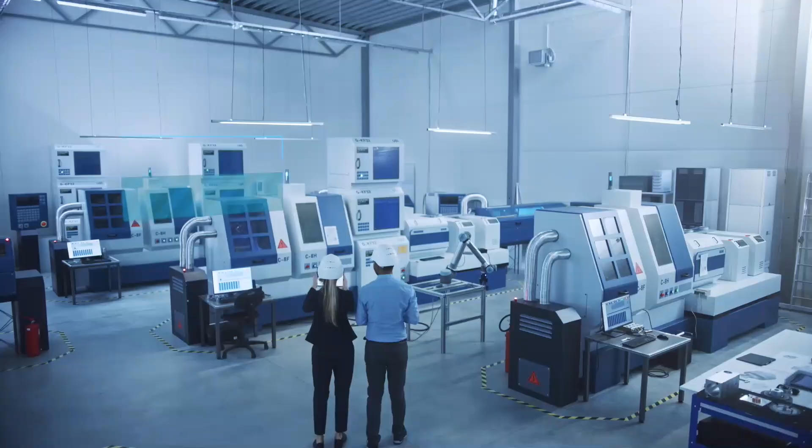Welcome to OPC UA for flat glass industries. It's the OPC 40301. And like already mentioned, I'm very happy that we have these three speakers. So we have Gerald Fehringer, Markus Schoisswohl, and Gesine Bergmann. And I would be very pleased if everybody of you could introduce yourself to our listeners.

All right. Thank you, Heiko. My name is Gerald Fehringer. Welcome to this presentation. I'm working for the company Lisec, situated in Austria, for more than 25 years now. And there I have a position as a system architect for our software landscape. And we at Lisec, we are providing machines as well as software components to our customers.

And we are in need of interacting with the machines with a lot of different software vendors. On the other hand, with our software with a different number of machinery vendors, and as such we are very interested in the interoperability, and this is why you see me sitting here basically in the first place. And secondly, I'm very pleased to be the chairman of this joint working group, and I have taken over this position recently from Markus, and I would like to hand over to Markus to introduce himself.

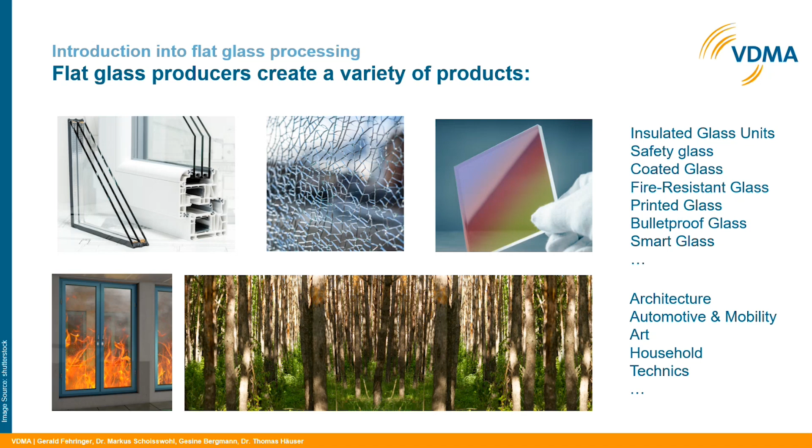These were only some examples, but I think these examples already show that flat glass and also the derivatives of flat glass really play a fundamental role in modern living. For creating these products, of course, various processes are necessary, and we can only point to some of them.

First of all, the cutting table, because cutting is the initial step in glass processing, where stock plates with a size of 6 by 3 meters are cut into pieces. This involves scoring the surface with a diamond or a carbide wheel at first, and then snapping it along the scored line. Or you can also use a laser and a thermal shock for cracking, or even water jet cutting is used. Important is the precision here, because this is crucial to minimize waste on the one hand and also to ensure that the pieces of glass are cut into the right required dimensions.

Following the cutting process is the edge processing to make the edges smooth. This can involve several steps like grinding, polishing, or beveling. What kind and quality of edge is made really depends on the application of the glass and the final product. And you should also keep in mind that this edge processing also increases the level of safety for handling throughout the lifetime of the glass.

Another example is drilling. This is also necessary in glass processing if you want to produce glass railings, for example, or facade installations. And this can be done mechanically, as shown here on the picture, or also by laser. Now the machinery starts to become a little bit more complicated.

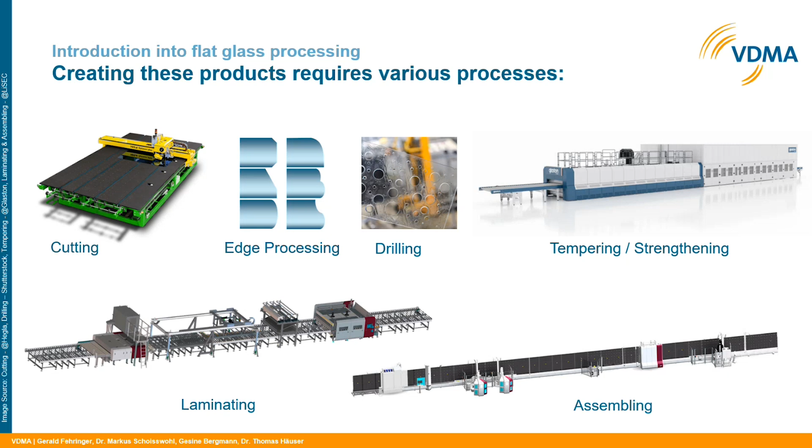Last but not least, the lines are becoming even longer, as in an assembling unit for the production of insulated glass that you have seen on the very first slide. So assembling really means a combination of at least 2 or more glass panes with spacer and sealing, to finally create a unit. This is filled with an insulating gas or air gas mixture in the space between the panes.

There are some more processing steps available. So each step is really necessary and really has to be taken into account quality-wise for the production of high-level quality products of flat glass. So why is it now necessary to introduce OPC UA into flat glass processing?

Flat glass processing companies are grappling with numerous challenges. First of all, very often we have the challenge that we have an order size of 1, that complicates the production process. That also means that the machines have to handle a variety of glass types and also glass thicknesses, but every time with the same high precision.

So automation and efficiency in the production process is really critical to meet the tight deadlines. A second challenge is that today customers have really high quality demands and they can easily detect defects in the glass product. So we also need an advanced quality control feature to ensure that we deliver defect-free glass products.

Then we have the challenge that very often the companies are small or medium-sized companies, and they are very often also serving local customers, and this is intensifying the competition. The energy-intensive nature of glass production already poses challenges on the whole industry with the rising energy cost. And the energy efficiency of the machines is also becoming increasingly important to control the production cost.

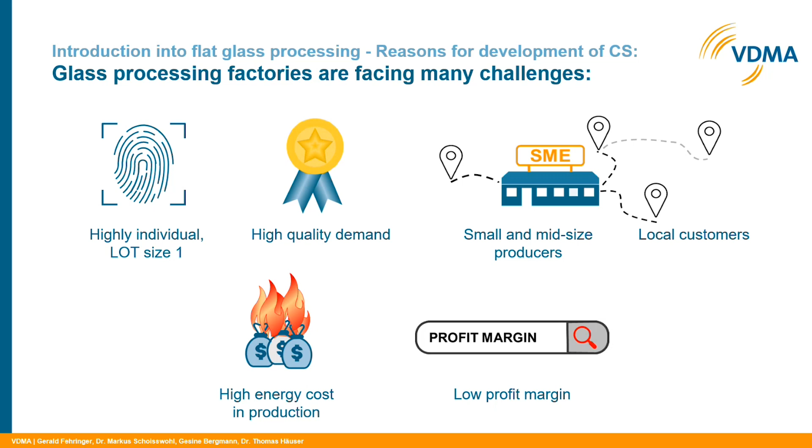Altogether this leads to still slim, low profit margins due to the high level of competition and due to the production cost. If you have a look at this production site overview, you might now get an idea of the possible complexity of a glass processing company. And with this, you can maybe understand why implementing OPC UA interfaces is really essential. I will only mention 2 or 3 key reasons.

First of all is interoperability. OPC UA is an open standard enabling seamless communication between diverse devices, regardless of the manufacturer. In flat glass processing, you can see we have various machines for cutting, processing, tempering from different vendors. So by standardizing communication protocols, OPC UA really allows the integration of equipment from different manufacturers to facilitate a cohesive and efficient production line.

Second point is data acquisition and monitoring. One of the advantages is the ability of OPC UA to facilitate real-time data. In flat glass processing, we need lots of different data from numerous parameters such as temperatures, processing times, pressures, and OPC UA enables the collection of the data from various sensors and machines, providing a comprehensive visibility into the process. This all leads to enhanced automation and control.

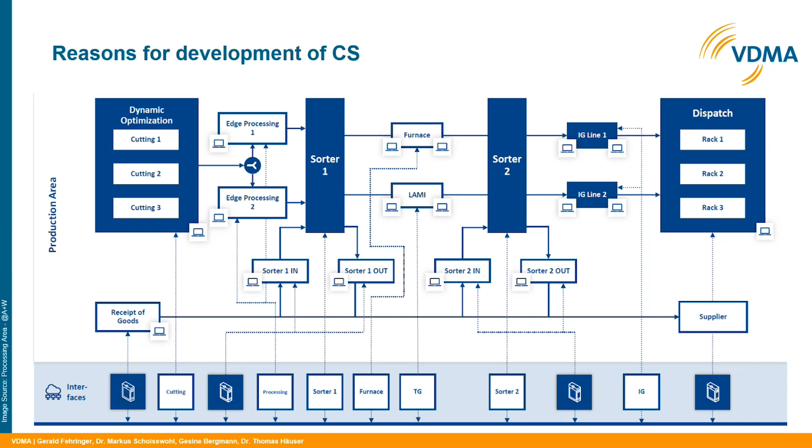OPC UA supports automation by allowing different systems to communicate and to coordinate their actions. In flat glass processing, automation is really crucial to maintain a high throughput and precision. I think there's no need to talk about scalability, flexibility, security here, because these aspects were already covered in the talks given before. With this, I start to hand over to the next speaker, allowing you to have a brief look at the members of our group.

I'd like to start, as one of the founding members of the OPC UA for flat glass specification, with a history. It all started in 2019 when about 10 specialists of machine builders and software vendors in the flat glass industry sat together and thought about how we can improve our performance with respect to our customers. It was rapidly clear that we can gain the most if we have a perfect performance while commissioning our machines and software.

That means this shall be smooth and as efficient as possible, meaning that we have to have interfaces that are not proprietary, creating risk and downtimes, but something that is standardized. Thinking of the topics that have to be communicated, we thought that there are three needs a machine requires in order to communicate. On the one hand, who am I? That means a machine can identify itself. The second is, what do I have to do? And the third is, how did I perform?

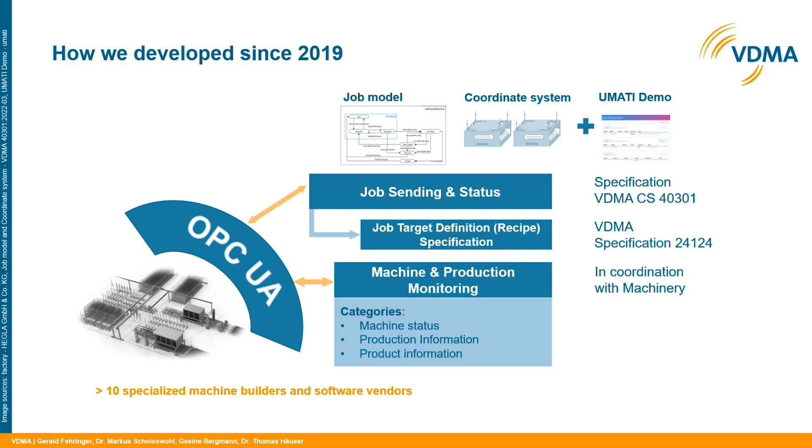So coming back, how it all developed. So first we had our specification for job sending and status, and we thought, you know, the world of flat glass is so complex. Let's be happy if we can have a solution that fits already for us. And this is exactly the context, and that was the mindset, how we developed our first specification. Also creating a job model, a state machine model that was particular for the glass industry, certainly derived from other job specifications, together with Sebastian Friedl, who did an excellent job. And we thought, hang on, this is great. This is already working. But we were in the bubble of the flat glass.

However, our job specification was such a success with us that Heiko came across, and he thought, hey, I need some new ways of working, or I need some new specifications to work on. And this is how we decided that the job specification of the glass can be one of the major starting points to create the job specification for machinery. But certainly, that is not something that the flat glass industry on its own can define, but we need the impact of other industries, the plastic and rubber, the woodworking, and all others that were involved and did an excellent job. Together with Wolfgang, we learned how important the ISA 95 is. Honestly speaking, for me, it was not known to that detail.

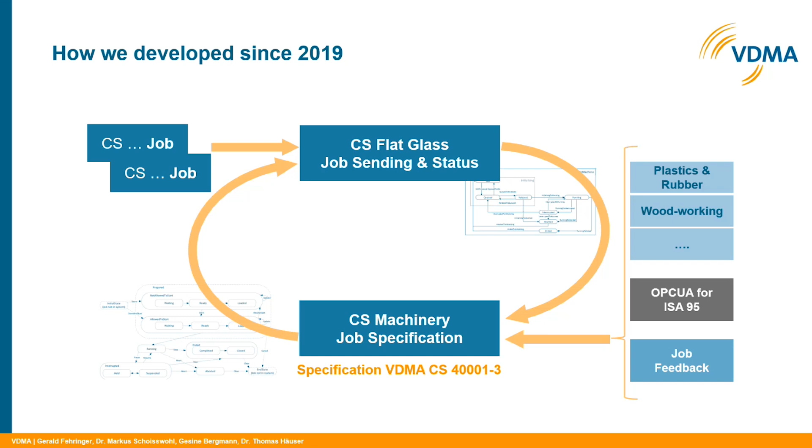But the important learning for us was that now we can use this as a basis, which is a very global basis, and where we can be sure that this will stay for a long time, as a lot of companies, not only in the flat glass industry, will apply this standard. And we just have to put our add-ons into the flat glass specification. And that means that we really have a strong reduction in the volume of our own specification. So it means coming out of a situation where we said, let's find something to unify the flat glass industry and create a standard.

And yes, we are so particular, we cannot be compared to anyone else. We have changed into an organization which says, hey, look what's already there on the machinery. For instance, for the file transfer, for the feedback, etc.

And only particular things like the job target definition and some particular specifications and conventions that had to be applied, had to be agreed, they shall be then in the specification, meaning that the new specification that is going to be released is of scope, of intellectual scope that is required to be recognized, less than 1/3 of what we had before.

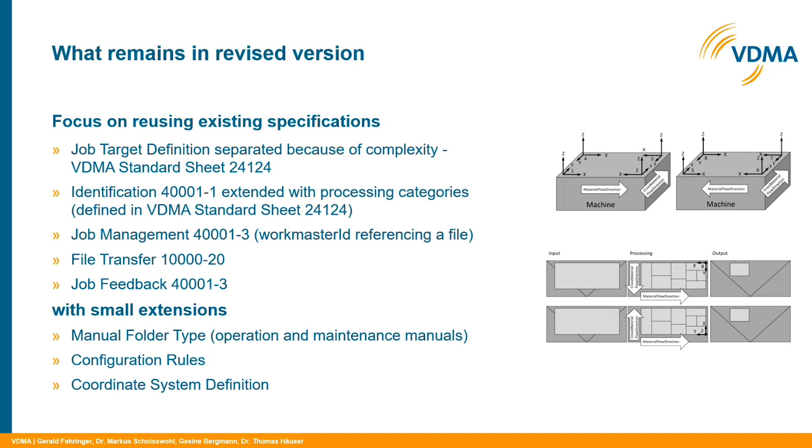And I think that's very important, because nobody's very interested in reading a lot of pages and saying, hey, I think I have this already somewhere else, and why do they make it in this particular way? But having said that, I don't want to focus alone on saying, okay, look, we reduced the volume and scope of our own specification, and therefore maybe it's not worth that the flat glass group may sustain in the future.

On the contrary, I think what we managed to do is to change our way of thinking, of saying we go beyond being self-sufficient. And what I mean with going beyond being self-sufficient is simply by asking questions within the group that we relied on later on into the machinery. And I'd like to show this on 2 examples.

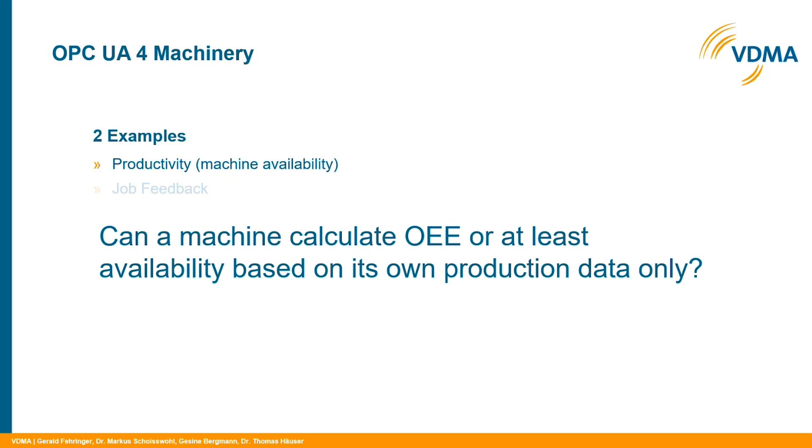The first one that we had when we were talking about machine feedback was, can we calculate OEE or availability as a base for the OEE only on machine information? And if you talk to machinery builders, especially if they do Industry 4.0 machines, they say, yes, for sure we can do. And I agree, they can do it. But is it the proper way to do it? And how can we do it together with OPC UA? And those were the questions that we were asking ourselves.

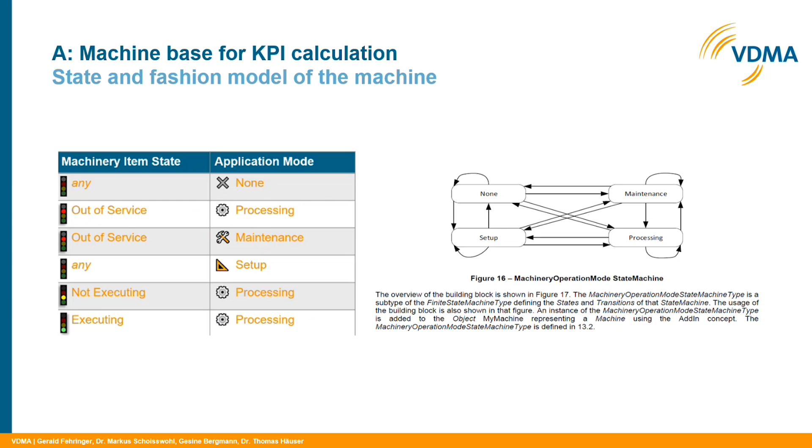But the question is, is this true? Yes, if you calculate it like that, and if you say that is the standard how it's calculated, then it's fine. But is it agreed, and is it an international standard? And I'd like to show you why you should put such simple answers into question by a very simple approach. Let's suppose you have an MES system, and in this MES system, you have planned already 1 hour of planned downtime for maintenance on your machine.

So that changes completely, because in that case, you're not counting on 8 hours, you're counting on 7 hours, and suddenly your availability increases from 62 to 71%. And the beauty of that is that suddenly you are compliant with international standards.

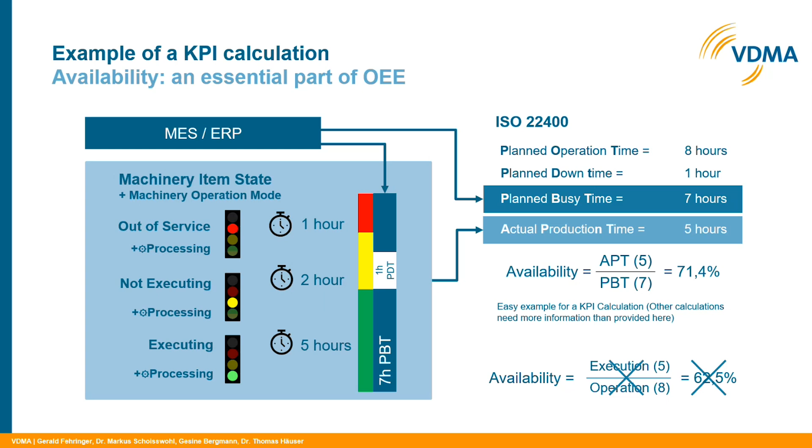So that means, and I hope this is very clear, that the machine on its own can be a source of information, but can never be self-sufficient without getting information from an MES system in order to calculate the proper values. Now, having said that, it's not a piece of cake to calculate the right values. And this is why I'd like to show you a little bit what is behind the ISO 22400.

The ISO 22400 example given for the times has a defined model. And honestly speaking, I find it very beautiful because it's simple. It talks first about planning. So you have a reference time that can be your 8 hours of production or whatever you have, or a day shift of 24, right? Then you have the possibility to say, look, from this time I take only operation time, and if there is a planned downtime, then I have a planned busy time of only about 6 hours, whatever it is.

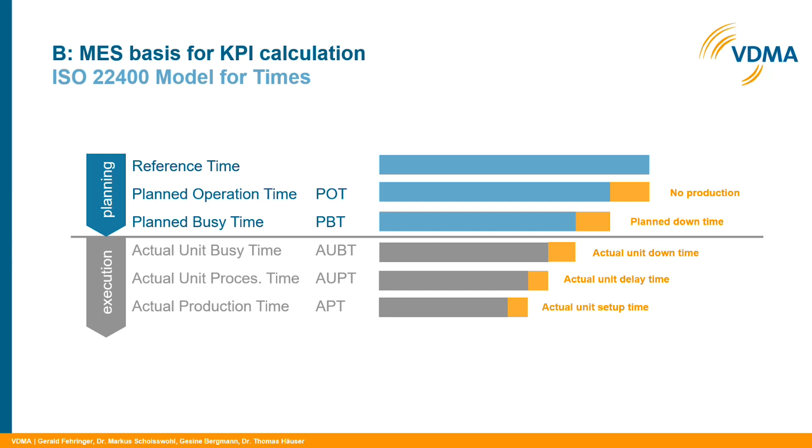But the point is that as a second source of information, it takes already the machine also with the times of actual unit busy time, processing time, and actual production time. And if you use this nomenclature in order to calculate, then you are on the right track. But the point is, how can we bring them all together?

And this is where we did a great job providing information from our OPC UA model and combining it together with information from MES. And here we had the great help of one of the experts developing the ISO 22400, where we made a reference table how we could incorporate the states of the machine itself into this model in order to calculate the proper KPI factors for the OEE. And the beauty of it is that this is now part of the standard of the 40001. I think it's the 1 or the 2, whatever, one of these specifications.

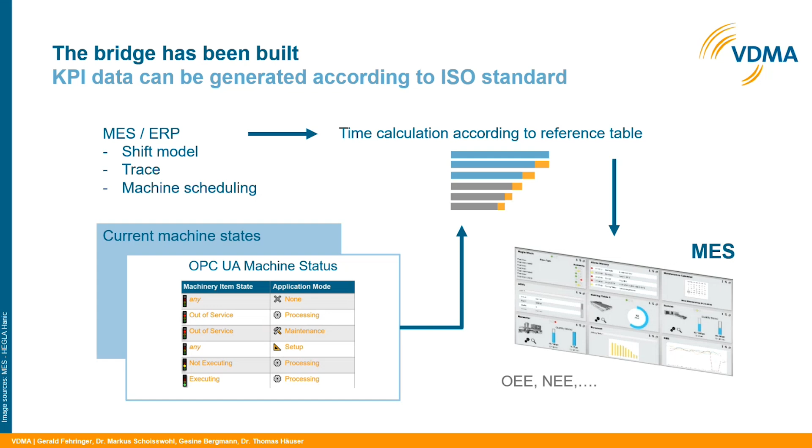Important is here we could show that the glass industry itself was no longer thinking only on its own. It started an idea, and it brought it to the attention of the machinery. And even further, we thought of what can be a reasonable business case that can be achieved by integrating other standards. And in the same way, we were thinking about job feedback. Now, what does job feedback mean?

A regular flow of job is exactly presented in the graph as you can see it here. You have the job definition, you prepare it, you run it, and you end it. It can be interrupted, aborted, whatever. However, whatever the job is, may it be a milling and drilling, may it be a grinding of the surface, may it be a drilling of a hole, may it be a painting, may it be an assembly of an IG line. Honestly speaking, it doesn't matter.

In the end, what you have is general information, which means when was the job done. Product information, that means which forces, which positions, which tools were used in order to produce the material. And the third is the bill of material, becoming more and more of importance as we have now to track supply chains, let's say, in line with upcoming regulations about supply chain management and supply chain follow-up.

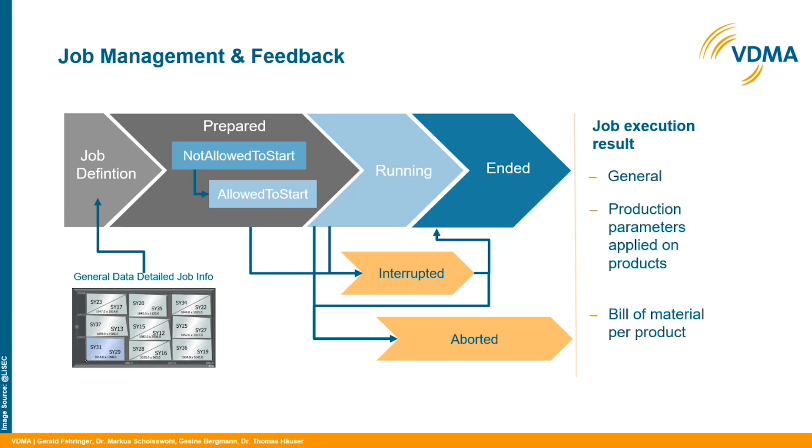So we have created also our own model for glass and even for another industry in order to show how such a standard of communication can look like. And the beauty was that Mr. Manke, Wolfgang, he came across the ISA, and he saw, without knowing from our side, that basically the standard of ISA-95 is not so far. So we could basically compile both informations and we could create a model for job feedback with this universal. And I show it just for you on two examples here.

One is a cutting of a glass where out of one product, that means one big glass sheet, as mentioned by Gesine, 6 meters by 3.21 meters, a few sheets, like 5 of the A1 and about 6 of B12 and a little bit of waste, are created out of it by cutting, scoring and breaking, basically. So it allows to do this kind of operation, as well as exactly the opposite, that you assemble something.

You have sources of raw material that can be paints or that can be spacer, desiccant, and gas, and you compile it to a product, including also general information and process parameters through the way. And the beauty of that was, once again, we started in our group, we brought it to the attention, and we could create a standard that is broader than what we will ever have in the flat glass industry. And the broader a standard is, the more people are potentially applying it, the more it has the chance to survive for the future. And that was the interest that we had.

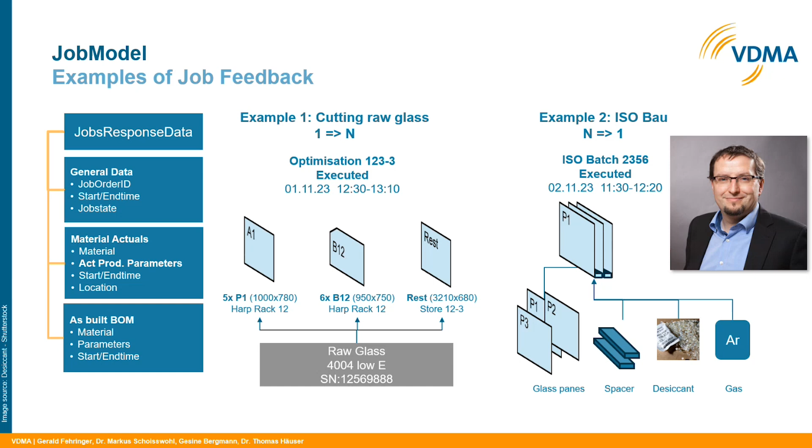Thank you. All right. Thank you, Markus, for introducing us to the companion specification and how we see it being used. I will continue now with the so-called job target definition for the glass industry, which is something that we have in the release phase at the moment as the VDMA standard sheet 24124.

The job target is basically a result of the many discussions we had on the job management, because we knew there was a lot of complexity behind it because of the product complexity that Gesine explained, because of the many different processing steps that we have and the many different kinds of machines that are being used here. And we finally came up with a structure that is depicted here.

We said, okay, on the input as well as on the output side, we basically need the three main building blocks, which are the products, of course. On the input side, products arrive at the machine, and these products need to be described through a bill of material with shape information, geometry, and the processings that they already might have at this point.

And on the output side, we might have one or more products that are the result or are exiting the machine at this point. And again, they need to be described with the details of material, bill of material, shapes and processings. Then there are certain machines where we additionally need some layout information.

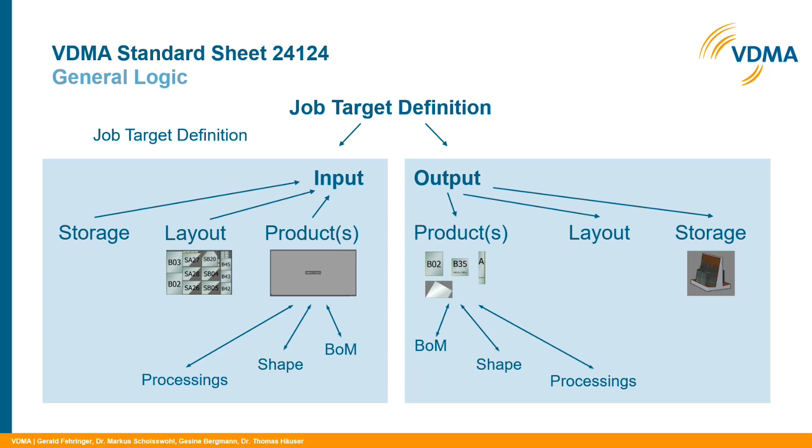And then we have another building block, which is the storage, because for the transport of the products between machines, very often racks or harp cars are being used, and the storage structure allows us to describe how the products are being stacked on such storages, for example.

Coming to a bit more detail here, bill of material is something where we have a general mapping onto material types which are defined within our group and within this VDMA standard sheet. And these materials can be aligned to each other using transformation information.

That means if we have an IG unit or any other laminated unit, for example, then we need to assemble multiple sheets of glass with some other materials sitting in between, and we need to locate these materials with reference to each other, and the transformation allows us to do this.

And we have another concept, which is the instance, which can refer to different types of materials or even processings, and that allows us to assign identification barcodes, for example, to the material, so that this can assist the scanning process on a machine or at a machine.

A second very important building block for the data structure is the shape. Of course, our products have a shape, an outline geometry, which we define through geometry paths, and these paths are combined as lines and arcs. We feel that lines and arcs are sufficient at the moment to describe any of the outlines that we meet in the glass industry.

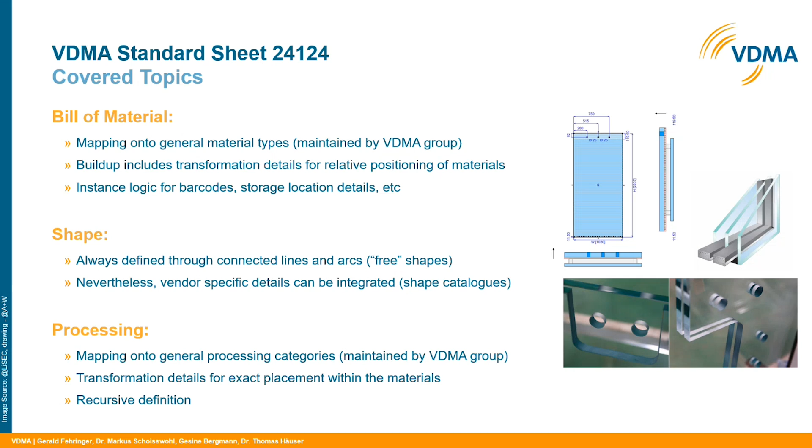Then coming to another major building block, and that is the layout information. This, like I said, is used for example for glass cutting machines, but also for foil cutting machines. It's essential. And also, if you look at the tempering furnace that has a furnace bed, and the furnace bed needs to be utilized with multiple sheets of glass placed onto it, we need the production planning system to do the optimization for it, and we need to transfer the geometry or the layout information here. We do this through rectangles.

And again, the rectangles have a recursive logic in them. That means inside of a rectangle, we can have more rectangles, or we split the one rectangle area into multiple sub-rectangles, which again can have sub-rectangles and so on. That means we have a kind of endless nesting capability, and this allows us to really serve the purpose of cutting on a cutting table, which is very special.

And then the third, if you remember the job target definition, one of the major building blocks per input-output is the storage definition. And here we chose a cuboid as the basis. That means a rack or something like that is a larger cuboid, which can be split into smaller cuboids, which are, for example, the sides. If you look at the bottom right image of a rack, you see two sides, which are two cuboids. And inside of these two sides, we have stacks, which are again cuboids.

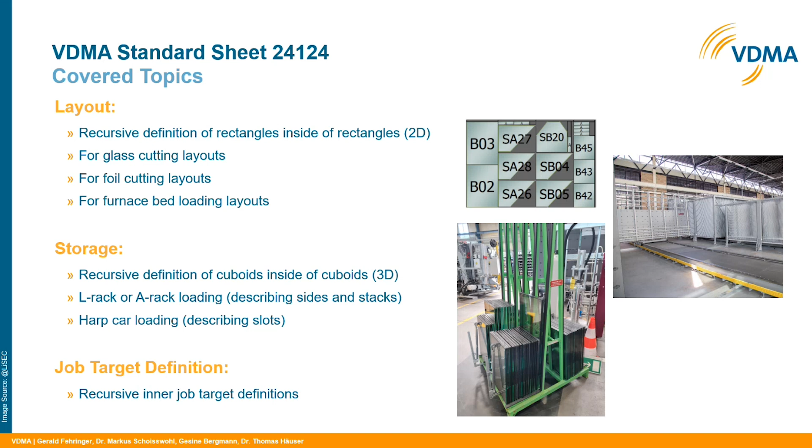Then I would like to highlight also another, let's say, piece of property that sits there in the definition. And this is the realization mode. This realization mode is a property which we have on a material level, as well as on a processing level.

And the realization mode can basically have three states. The one is the input state. That means through this we indicate the material or the processing are already there on the inlet. That means the material is already there, or the processing has been applied already on a previous machine. That means there is nothing to be done on the current machine.

If we declare a material or processing to be output, then this means we want to add this material at this processing step, or we want to actually execute this processing on the current machine. And if we define it as future, then this means it's not there in the inlet. We are also not supposed to do it on the current machine. This is something that will be coming up in the future in the lifetime of this product.

And what's the advantage of this? The thing is that we can transfer the full product complexity and the full product information to each and every machine, actually. And with declaring some items or some processings or some materials as the output, we indicate, okay, this is the part you actually need to do. And if the machine is intelligent enough, or maybe in the future becomes intelligent enough to also consider what comes along in the input or what will be there in the future output, it could consider.

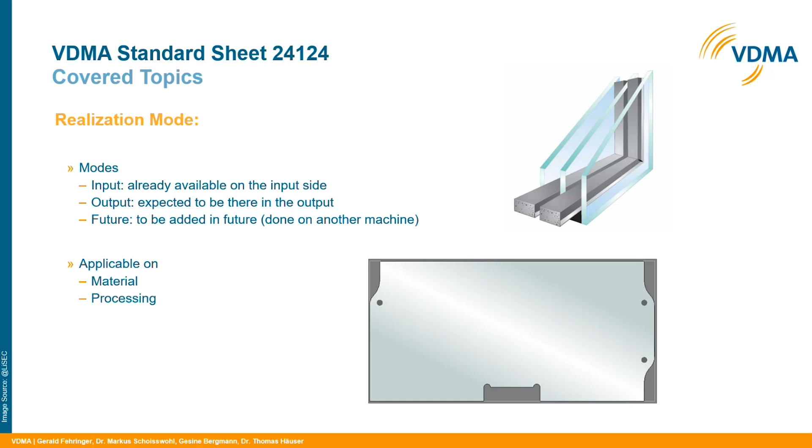And then finally, coming to a bit of technical definition here, we are using a JSON representation of this model, because we feel this is a very common approach and can easily be handled with many programming languages. And we are making use of the protocol buffer definition language. Possibly a few of you might be aware of that.

And for this definition language, there are interpreters or precompilers that allow automatic code generation of classes and methods, so that it becomes rather easy, for example, to fill such a model, to serialize it as JSON, or to deserialize it from JSON into an internal model, which should make the handling of such information rather easy for whoever is trying to apply these concepts. Yeah, I hope I could give a rather comprehensive overview of our job target definition, and what makes up the complexity, but also the beauty of it.